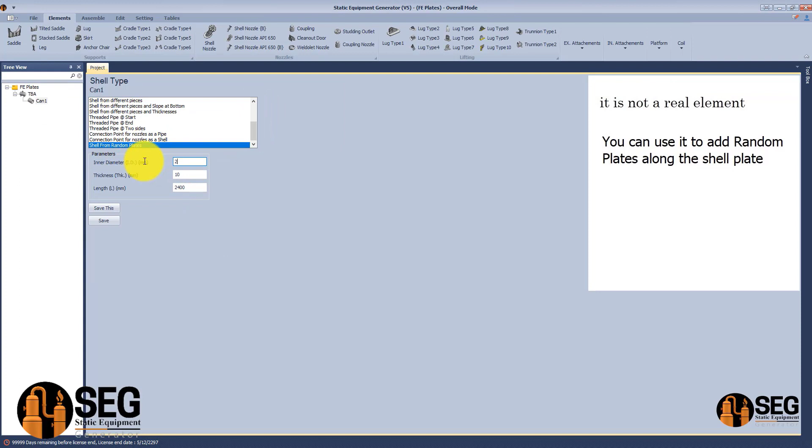Now let's select the new type of shell, which is shell from random plates. After that, we will add a new child. This child will give you the ability to create those plates and give them the suitable arrangement for your case. Now let's select the first plate. Here let's define this plate. Let's start from 330, okay, and end at 100 degrees.

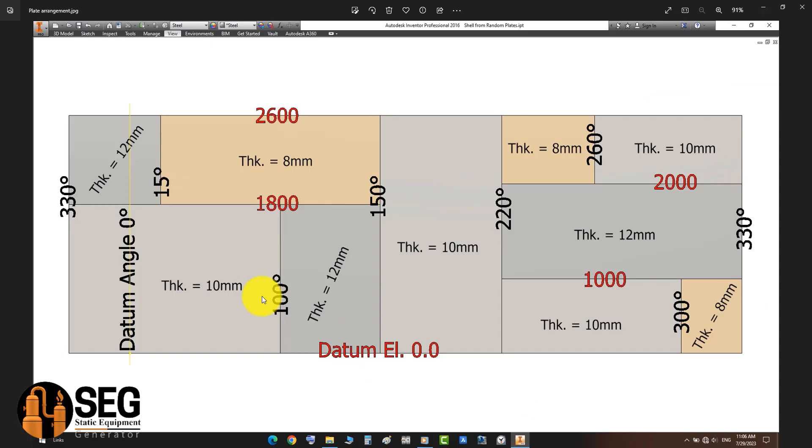So let's define the location and length for the plate. Okay, so we have the datum line, and now let's define the start and end angle. They should be in the clockwise direction. Now the second plate, let's define the thickness, okay, and the location. Start from 1800, and now let's define the length.

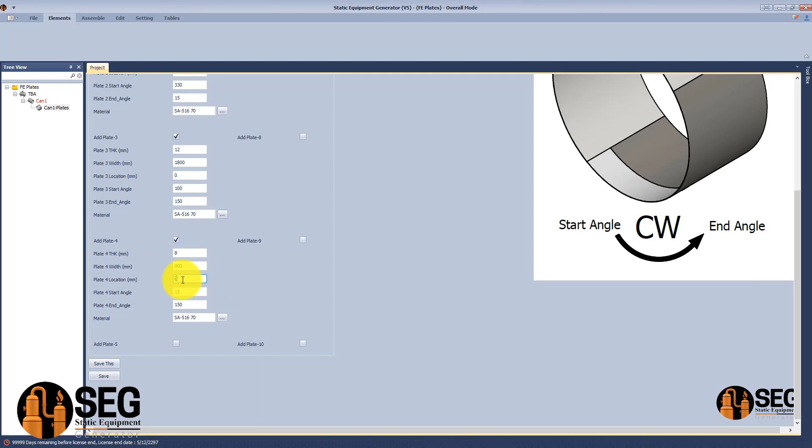The third plate starts from 100 degrees, okay, up to 150. Now the length of this plate, let's define the length and the thickness. Okay, the fourth plate starts from 15 degrees up to 150. And here the thickness of this plate is 8 millimeters and the length is 800. The location from the datum is 1800.

Now let's define the next plate. The same thing for each plate, defining the start angle and end angle, and you should take into consideration that the definition of the angle should be in clockwise direction. Okay, the next angle, let's define the start and end angle, define the length and thickness, define the location. Okay, here we have the length of the plate. Let's calculate it and define it. After that, the location.

Start from 220 and end at 260. Define the length and location. Now the last plate. Let's define start and end angle. 260 and 330. The length and location at 2000. Now let's click save and start creating this shell plate.

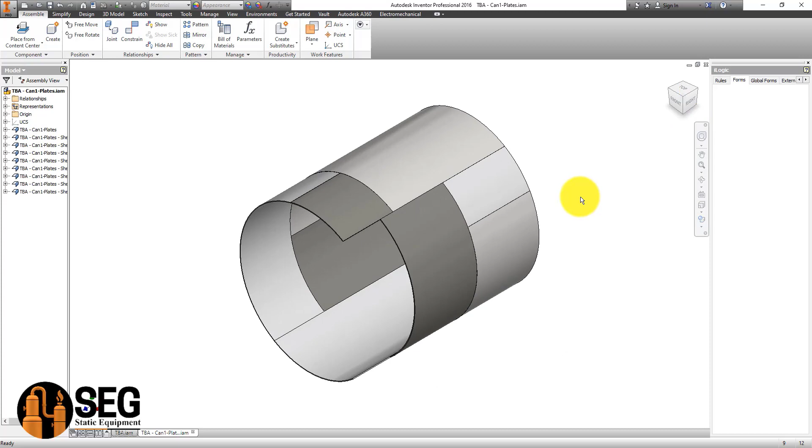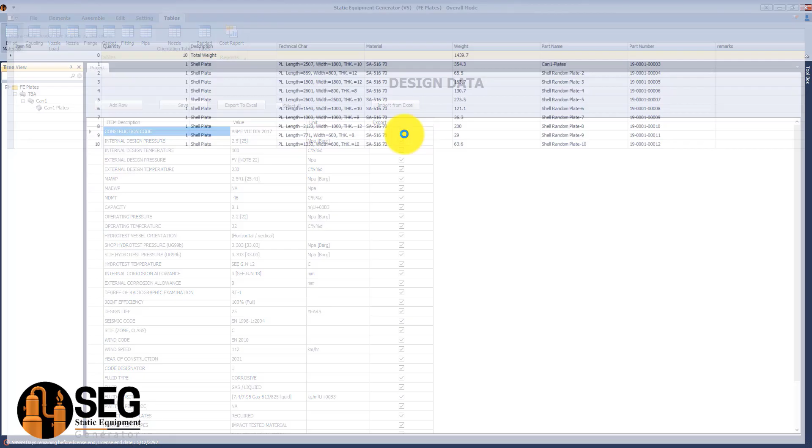As you can see here, you can create this shell from staggered plates as mentioned on the 2D drawing. Something like that is very difficult if you would like to create it by hand, but with SEG you can generate that easily. Here you can generate your bill of material in seconds and you will get a detailed bill of material for the shell plates with actual lengths for plates.

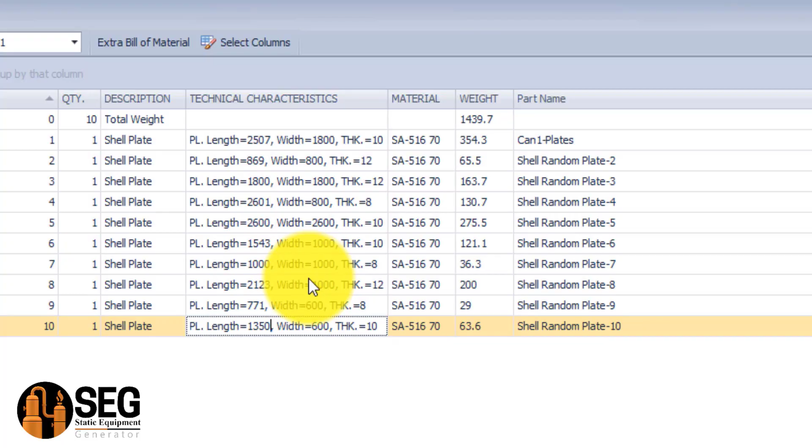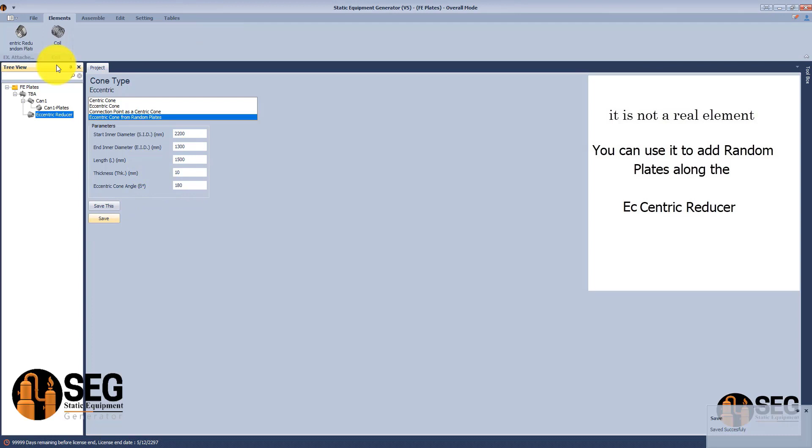In SEG version 5.03, you can generate a concentric and eccentric reducer from staggered or random plates. Now let's add an eccentric reducer from random plates. After that, you have the ability to add a child as random plates. Now let's define the first plate thickness, first plate length, location, start and end angle, and take into consideration that the start and end angle should be in clockwise direction.

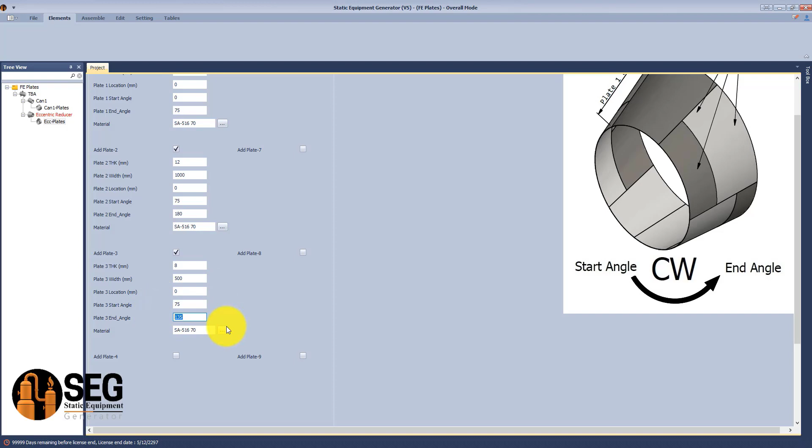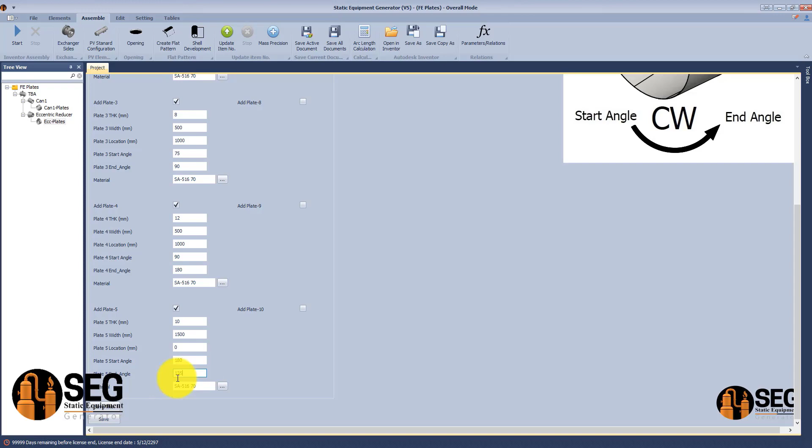Now let's define the third plate, thickness, location, start angle, end angle, and let's add another plate, thickness, length, location, start and end angle. Let's define the dimensions of another plate. After adding all of your plates, you can run the assembly to generate the 3D model of this eccentric reducer from random plate arrangement. Now let's run the assembly.

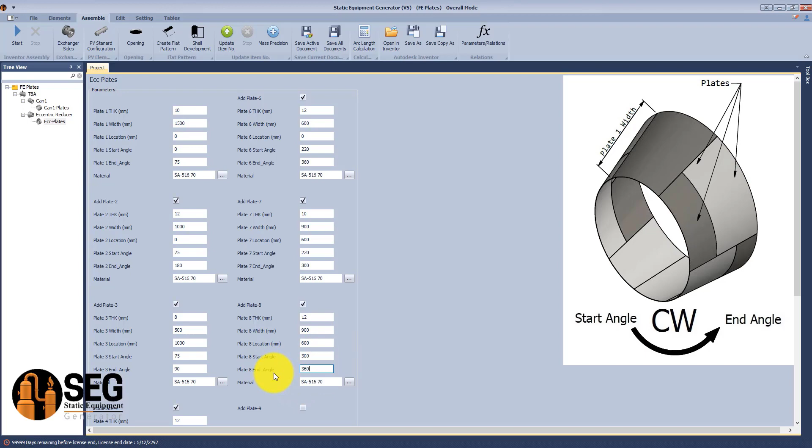Now as you can see, you have this reducer from staggered plates. It's a very complicated shape, but with SEG software you can generate that in minutes. Now you will get a detailed and complete bill of material for this reducer.

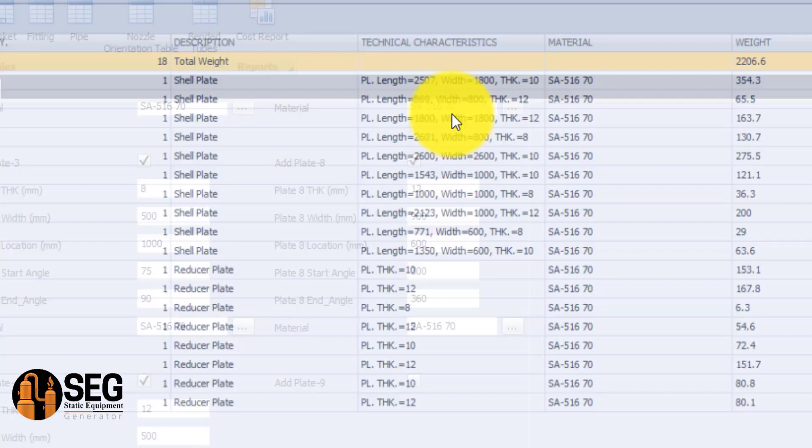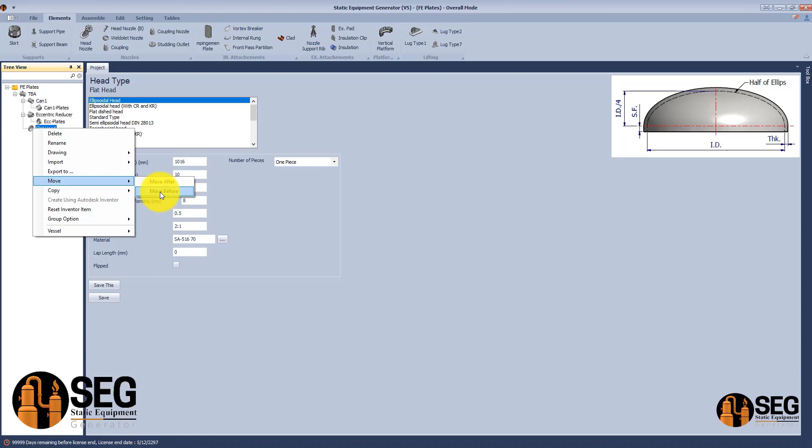With SEG version 5.03 you can generate a flat head or a flat bottom for a tank from random plate arrangement. Now let's add a flat head. Okay, and from here let's move it before the shell, can 1. So now let's select the last type for heads. After that, let's add a child which gives us the ability to define each plate separately.

Now we have the first plate with the thickness 10 millimeters, and here let's define the length and width as per this image. As you can see, the location or the datum point is located at the top on the right hand side, and the location for the reference point for the plate, you can define it as per the image on the right hand side. After that, define the length in X direction and the width of the plate in the Y direction.

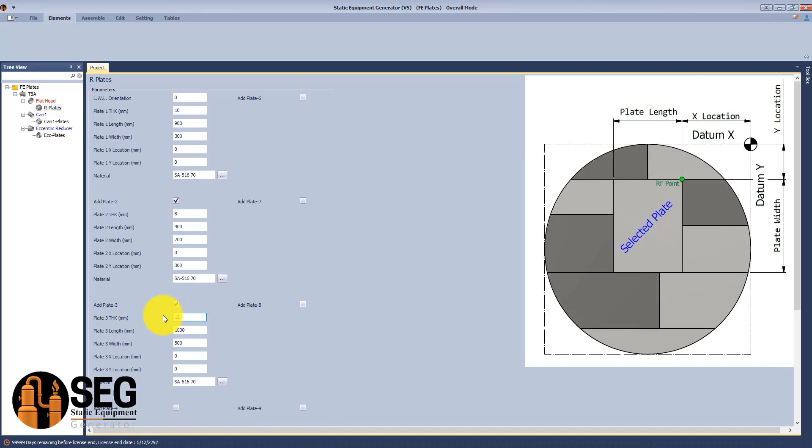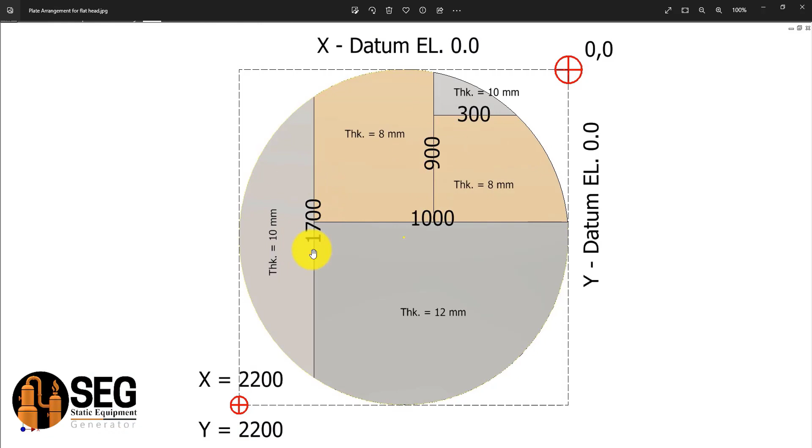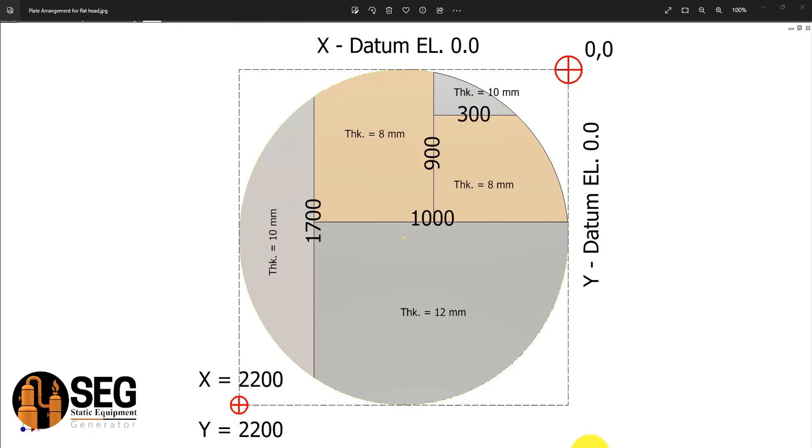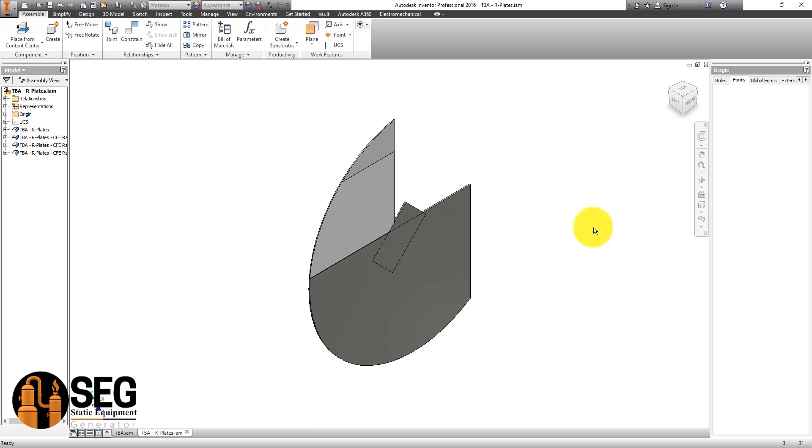Now let's define the last plate. We have the length of the plate in X direction and the width in Y direction. After that, let's generate the 3D model for this flat head from random plates. Now we get the same configuration that we have on our sketch.

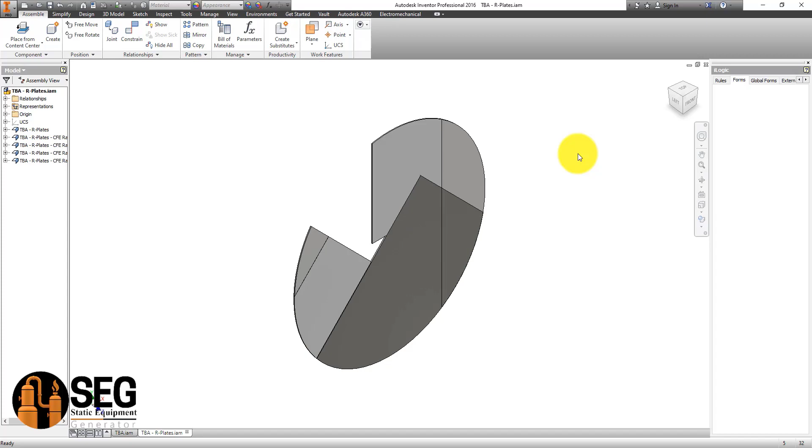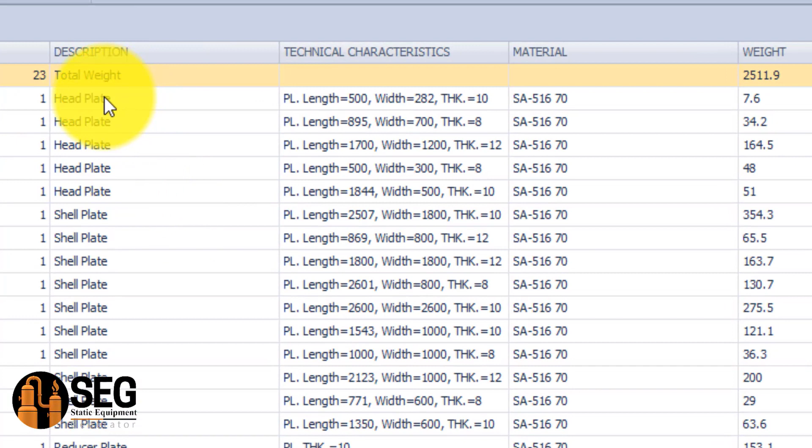Now one more option, you can control the orientation of the plates. So if you change the orientation to 45 degrees and update your model, as you can see, you can rotate all plates 45 degrees from the datum point. And you can get a detailed bill of material for this head. As you can see, you will get the actual dimensions for length and width in detail.

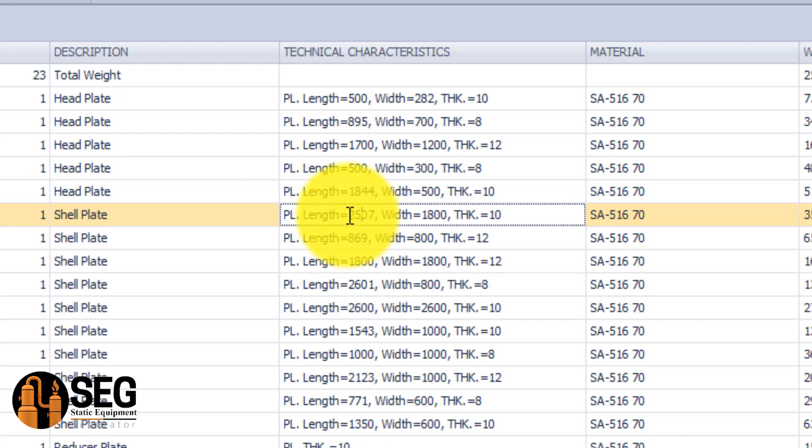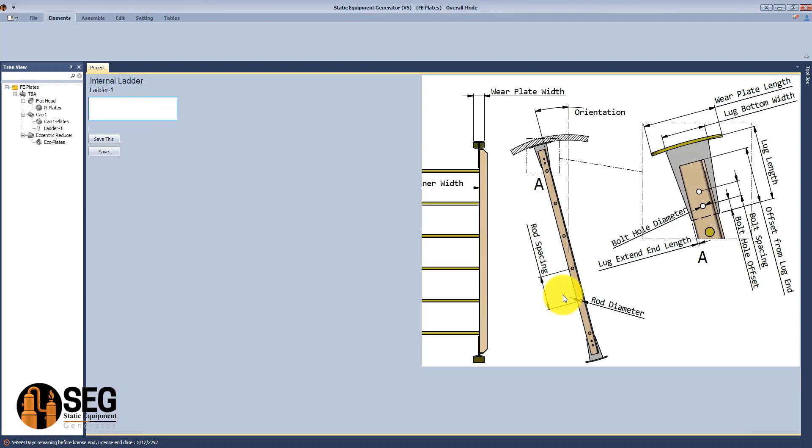With SEG version 5.03, you can generate internal ladders inside the shell. You have 4 types of internal ladders. The first 2 types go across the shell in the circumference direction. You can make the main sides of the ladder from equal angles or from plates. That's the first 2 types.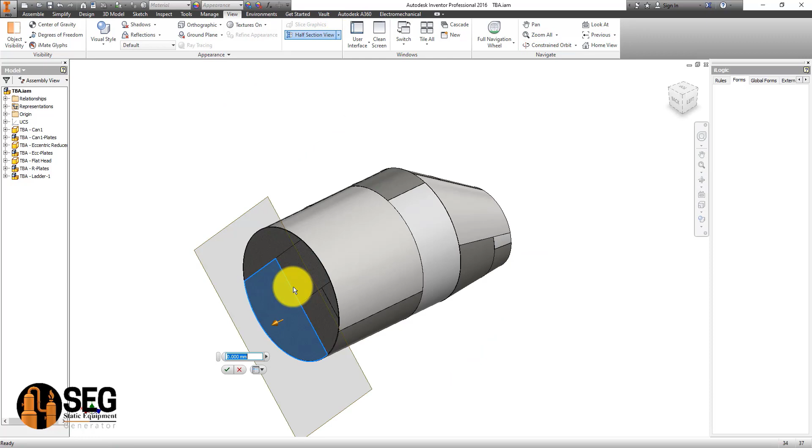As you can see, if we take a half section or a section in the circumference direction, it's across the diameter of the vessel. Now let's add another type of ladder. We have type number 3 and type number 4, type C and D. They are along the shell. And you can make the sides from equal angles or from plates.

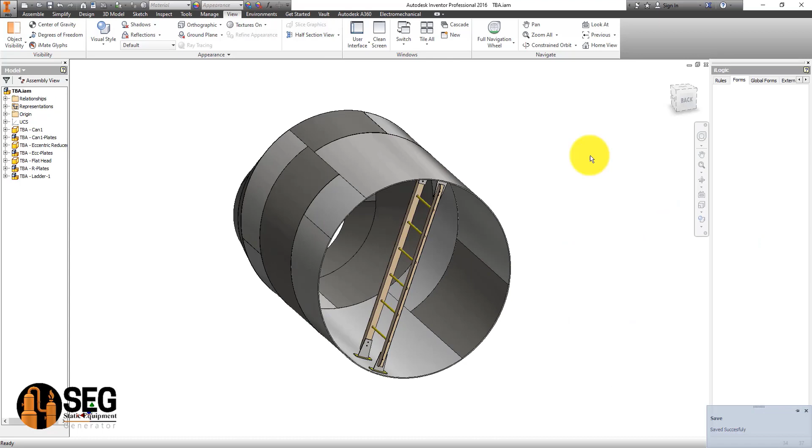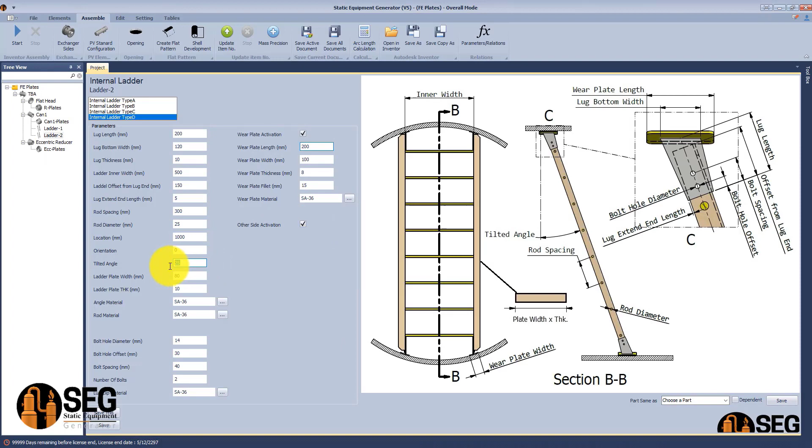As you can see here, the difference between the first 2 types and the second 2 types. And here you can see you can make the ladder from equal angles or from plates, like that. And by the way, you can flip the direction of ladder type C and type D to make them go in the other direction, if you would like to flip the direction of the ladder, by using the other side option.

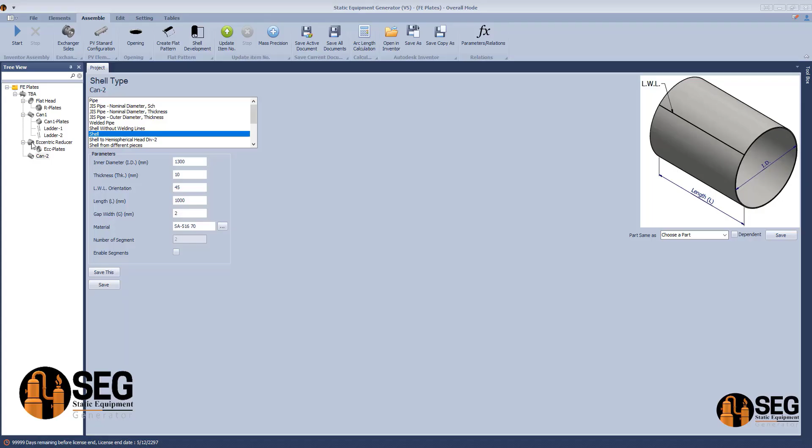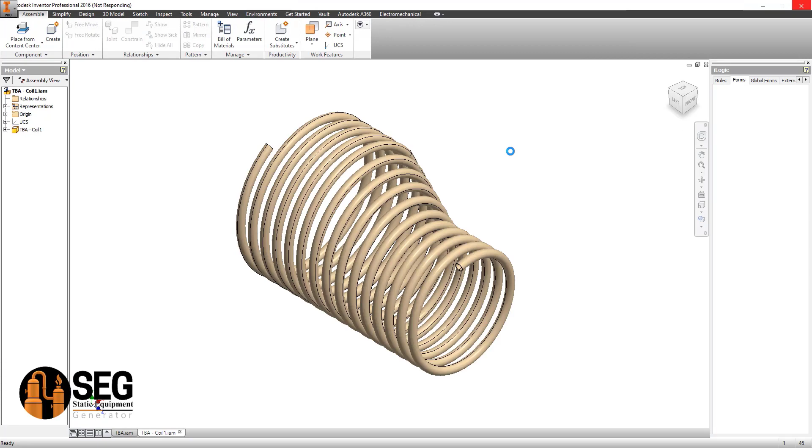Now with SEG version 5.03 you can add a coil to centric or eccentric reducers. Now if you select the eccentric reducer, which is created from random plates, you can add a coil to it by defining the dimensions as per the attached image on the right hand side. Now you can generate this coil along the eccentric reducer.

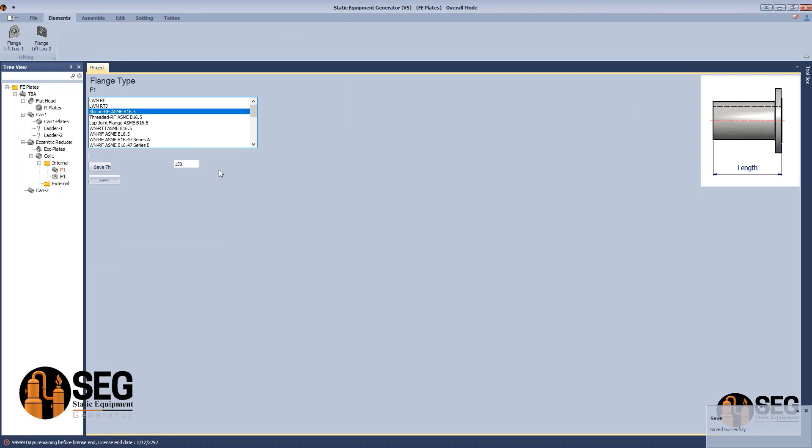And besides that, you can add attachments to the two ends of this coil, like adding a pipe to one of those ends. After that, adding a flange at the end of this pipe, defining the flange to be a slip-on flange. Now let's add another pipe, same as the previous pipe, and another flange to the second exit. And now let's run the assembly. As you can see, you have the ability to add a piping connection to the end of the coil.

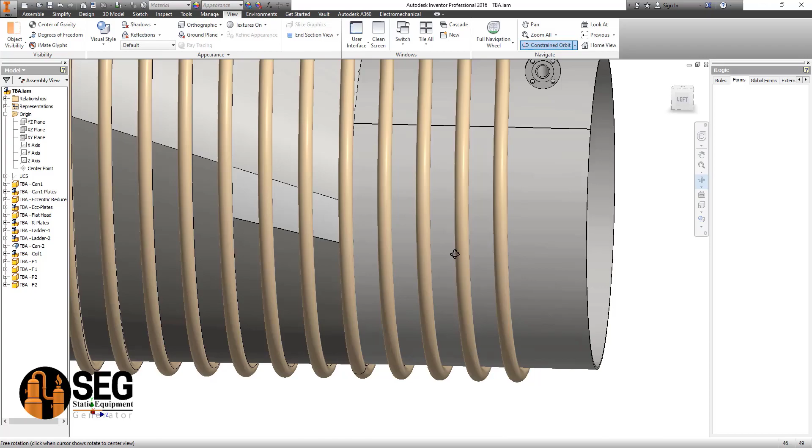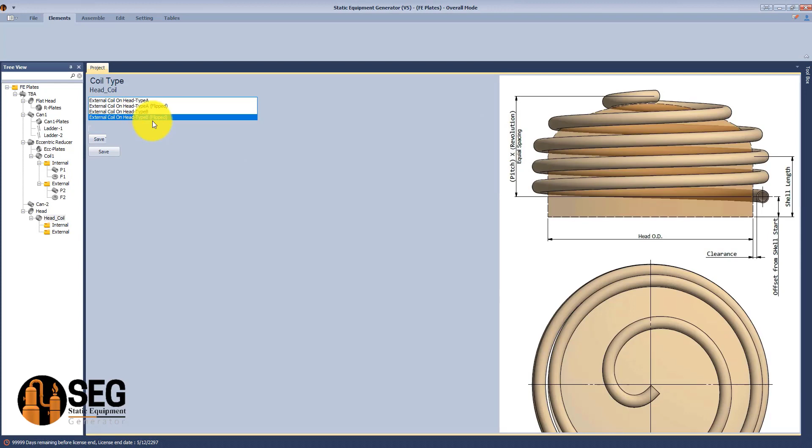With SEG version 5.03, now you can add a coil to the head with crown and knuckle radius. You will find two main types of coils. The first type defines equal spacing along the straight flange, and the second type we will create with equal pitch from the top view.

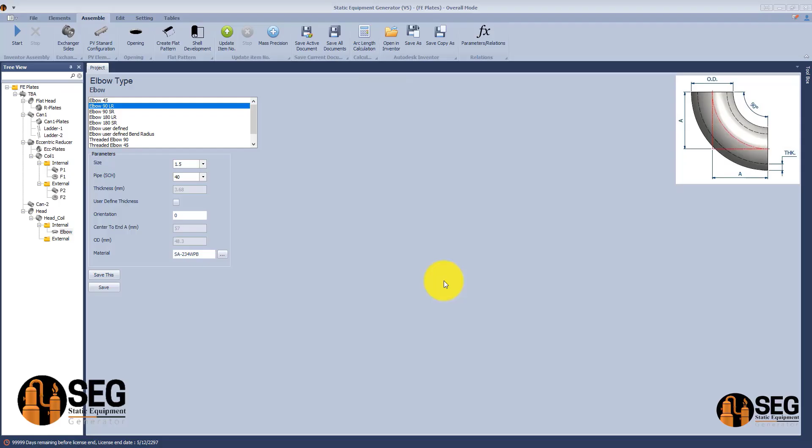Now let's generate this coil and add a connection to the ends of this coil, like two elbows, and define the orientation of each elbow at the end. And now after generating the 3D model for this coil with two connected elbows, as you can see, you can make a coil at the top of the head that way.

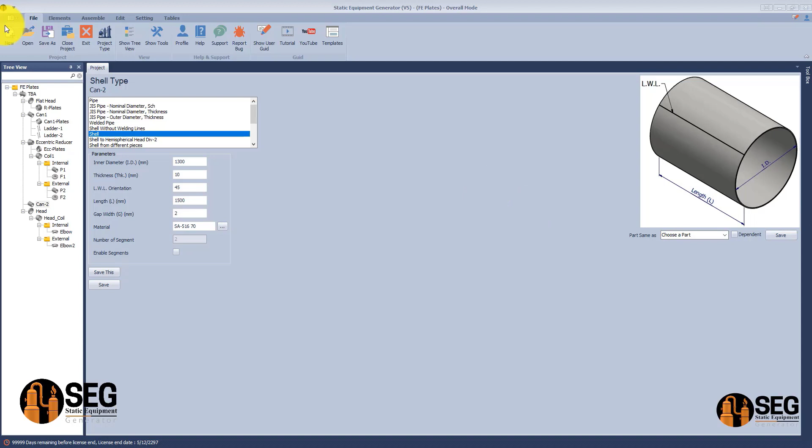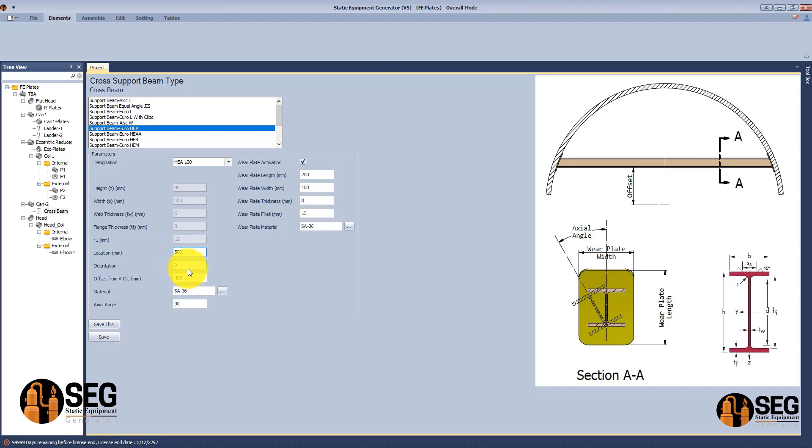Now with SEG version 5.03, we updated the cross beam feature to include a wear plate on the two sides. Now, for example, if you select this type of cross beam, you will find an option to add a wear plate. Now let's define the location and some other dimensions. Now let's run the assembly and you can see that you have two wear plates along the cross beam.

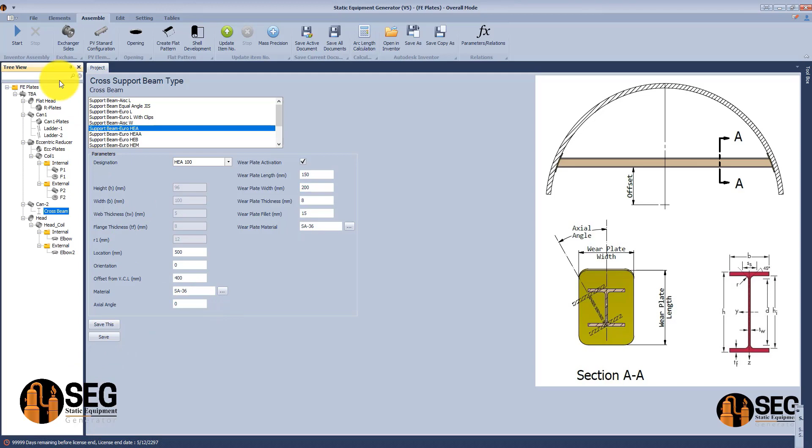And you can rotate the cross beam around the axial orientation. So let's change it to 0 instead of 90 degrees. And now let's run the assembly to update the orientation of the cross beam.

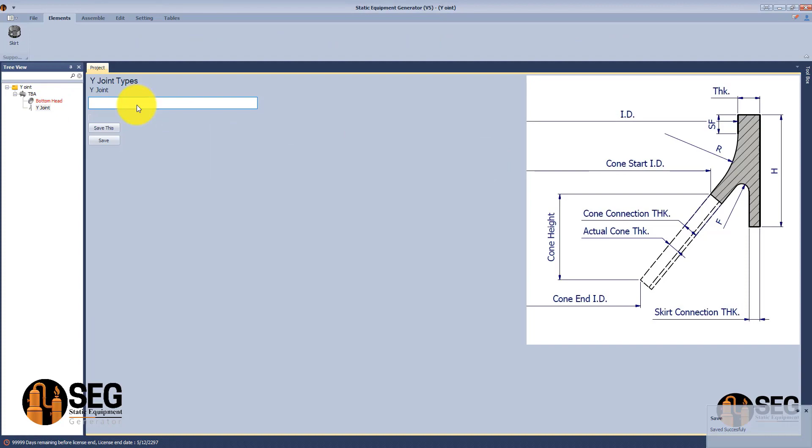With SEG version 5.03, you can generate a Y joint connected to a hemispherical head with negative straight flange. Now let's add a hemispherical head with negative straight flange. Let's keep all dimensions as they are. And now let's add a Y joint, but this time let's select the second type, which is connected to a hemispherical head. Now let's define the dimensions as per the attached drawing.

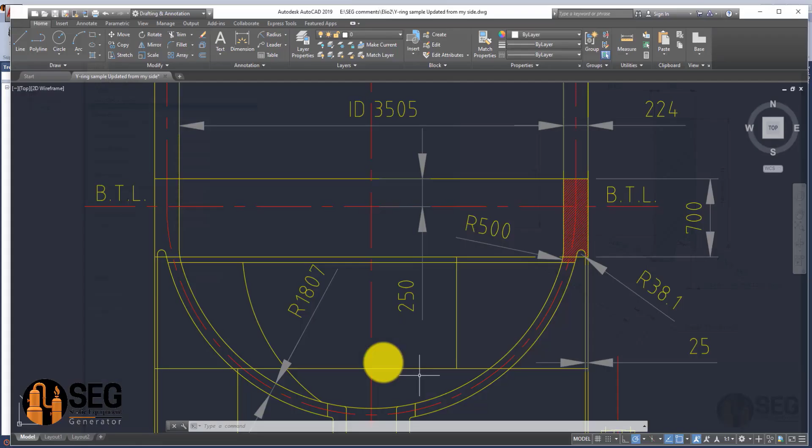The height, the inside diameter, thickness, the fillet and the radius, all dimensions of this Y joint connection, the head inside diameter. So let's calculate it, because we have the radius, the head thickness, and the straight flange, which is the value of the negative straight flange of this head.

Now let's run the assembly, and as you can see, during the generation of the 3D model, the head is not with a correct dimension. Now let's open the Y joint connection, get the right values and put them here in the head with negative straight flange.

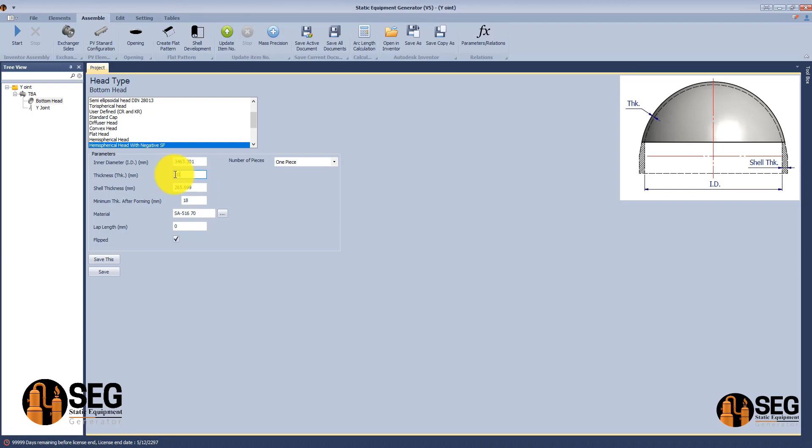And now let's update the model to correct the dimensions of this head. Now let's take a section and check the dimensions. Everything is okay now after modifying the head dimensions based on the Y joint.

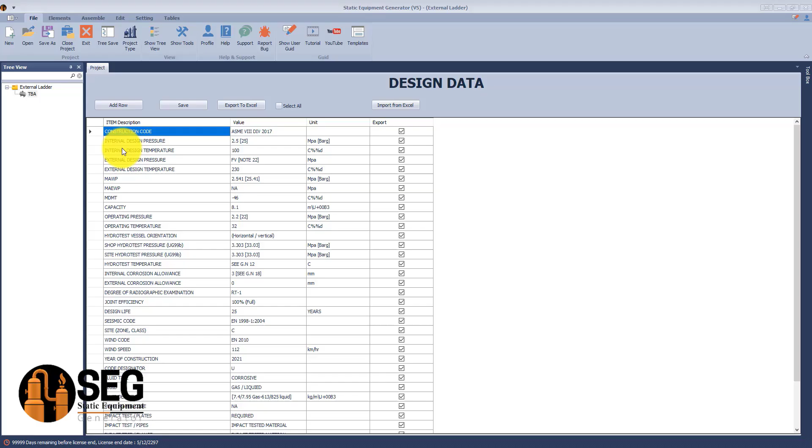Now in SEG Software version 5.03, we have developed a new feature for the JIS standards. We have three different categories. The first category is defined by nominal diameter and schedule. So you can select the suitable standard, then select the size, and after that, the schedule. The second category is defined by nominal diameter and thickness. So you can select the standard, then select the diameter and thickness.

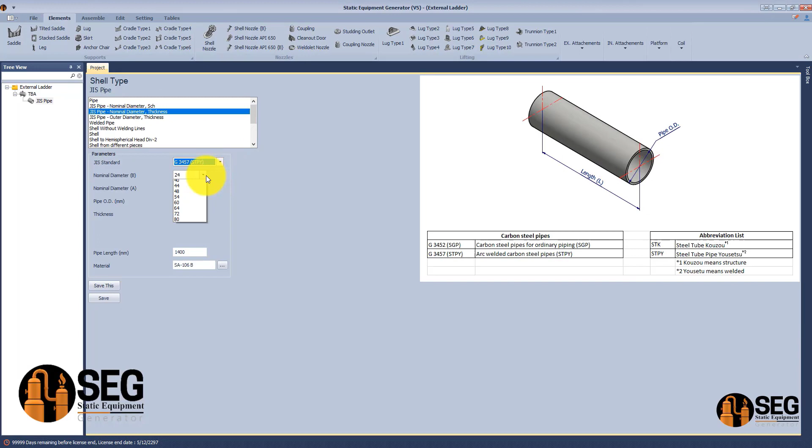The third category is defined by outside diameter and thickness. So you can select the standard from the list, then select the size and thickness. Now let's create this one and add an external ladder for this pipe. And you will find that we have two different types of external ladders.

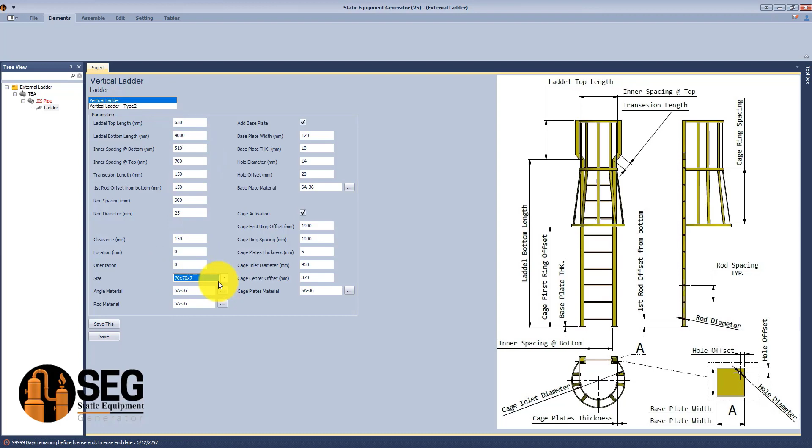One of them includes equal angles as the sides of the vertical ladder, and the second type uses plates, so the sides of the ladder will be created from plate. Here, as you can see, in that type, the ladder sides are from equal angle, and here you have a cage for this ladder. You have the ability to add a cage and a base plate for the ladder with fixed holes.